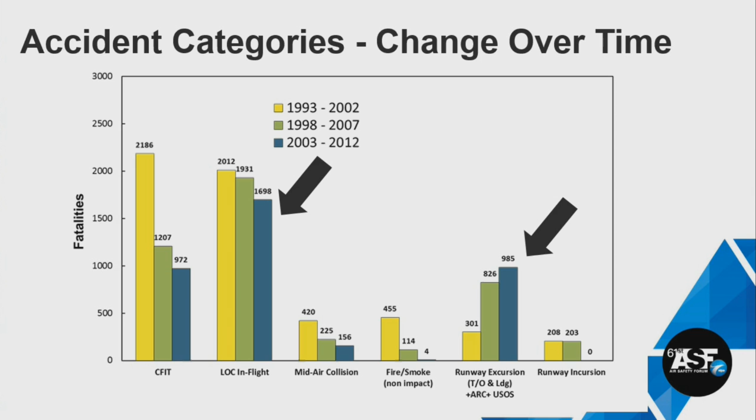Operational considerations are important, training is very important. So we're working in all these areas and working with ICAO, other manufacturers, pilot groups around the world to help get some information into their hands to help in these areas, as well as looking at different technology that might be available. But these are the two areas from a safety standpoint that are really our focus: loss of control in flight and runway excursions.

When we talk about technology, I've got to give credit to a colleague of mine at Boeing. He was here a couple of years ago, Mike Carriker, and he talked about the changes in technology that have taken place over time. So I'm stealing a little of his material, but I thought it was a really good message because it puts things into perspective. These are some of the areas where we've seen some big technology changes from the 727 to what we have today in the 787.

In the area of auto flight, the 727 has some pretty basic modes on it: heading hold, altitude hold, and VOR track, and that was about it. Today, you got guidance from 50 feet on takeoff right down to rollout. So pretty precise autopilots today.

Flight directors weren't coupled to the autopilot. Today, they're fully coupled to the autoflight system. No auto throttles on the 727. Today, auto throttles from toga all the way to flare, so very, very integrated systems.

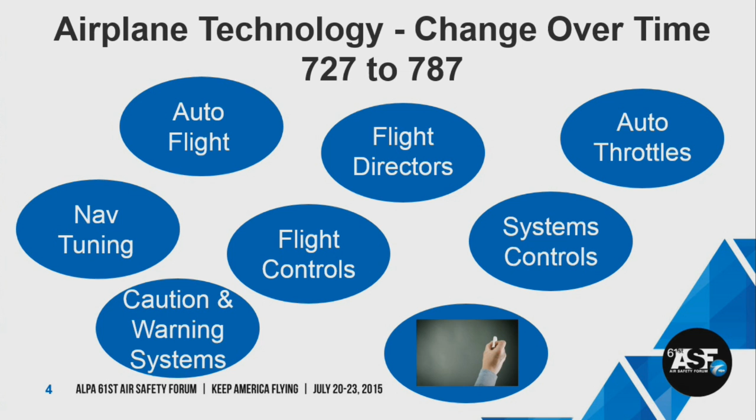In the areas of fuel systems, mechanical engine fuel controls—today we have FADEC with auto relight, auto shutdown, auto start, everything's automated today. Flight controls: cables hooked up to actuators, and today closed flight loop systems, flight control systems that have all kinds of alleviations and compensations that are all automatic and the pilot doesn't even know what's going on. Caution warning systems were very distributed in the 727 days.

With the 787, we have EICAS. And certainly all the systems on the 727 were pretty much controlled manually, and today our systems are all controlled automatically. And the other little bubble down there is a chalkboard. I put that on there because with the 727, you could draw out the systems on a chalkboard. Today, you'd be kidding yourself if you think you could draw out the systems on a 787, even on a whiteboard. So lots of changes just in the way that we look at technology.

One of the areas that we're working on in terms of new things in technology is our Eco Demonstrator program. We started this back in 2011, and since then we've looked at about 40 different technologies. We started on a 737NG, then a 787, and in April of this year, we launched our Eco Demonstrator 757 program in conjunction with the TUI group out of Germany and NASA. So we're doing some joint things with those two organizations.

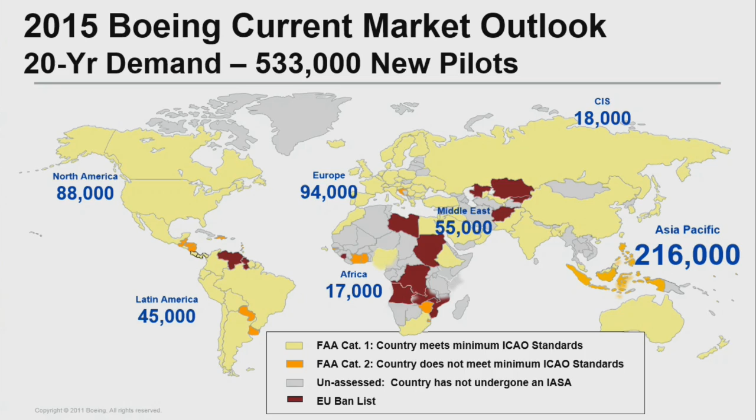Now you see this map and you see some colors on there—the magenta color. Those are countries, and here's the real risk that's out there for these kind of numbers. The magenta colors are countries that are banned by the European Union from flying into the EU, and the orange countries are countries that are prohibited from flying into the United States. So we're spending a lot of time trying to get rid of those orange and magenta colors. What we're talking about here isn't necessarily unsafe airlines—it's regulators that don't have very good capabilities or the capacity to oversee these airlines and operate a very good system. So those of you that fly internationally, this is important to you too, because you're flying into some of these countries. A lot of work is being done by Boeing working with these various regulators around the world, again to try to get them all yellow like North America and much of Europe is.

So those are kind of the three areas we're working on in terms of safety, efficiency, technology, and growth.

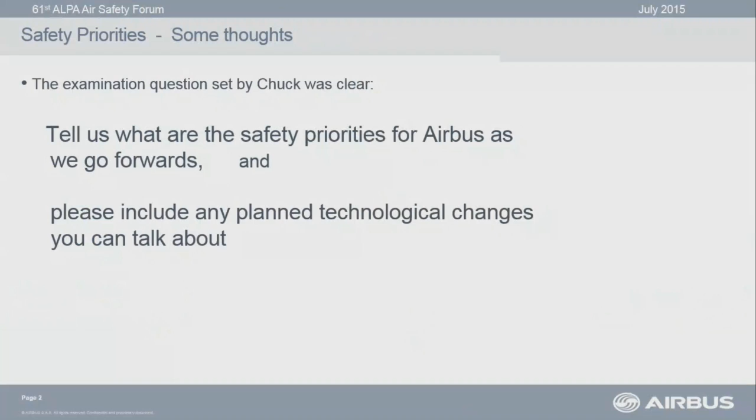The question I was asked by Chuck was to tell us what safety priorities we've got, and tell us, if I can, about any technological changes. So that's what I've tried to stick to.

In terms of safety priorities, I agree with almost everything Tim said this morning in his opening remarks, except perhaps for one, which is that I don't think we've gathered all the low-hanging fruit yet, especially when you look on a global basis, which we have to do inside Airbus. I think in the US it may be more true than in other areas of the world. Certainly, you guys are leading the world, and the rest of the world in many areas looks towards what you're doing and learns from that, and I think that's very important.

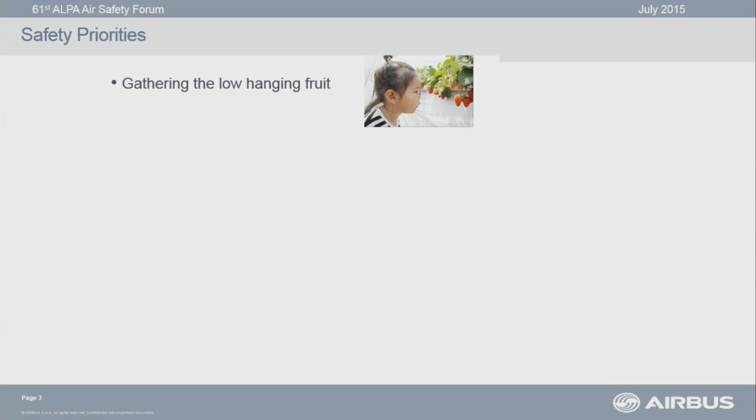What do I mean by low-hanging fruit? I'm looking at everything from regulation, from harmonization, from the development of EBT, competency-based training. Let's get rid of dive and drive—they exist all over the world in other areas. And circling approaches—we now have the capability of replacing circling approaches.

Mentoring is something we've been talking about, but are we doing it really around the world? Certainly not enough, in my view. Best weather on board was mentioned at a presentation before lunch. I think it's time we had better tools for weather assessment on board. It can be done—the technology exists.

I'll also look towards ourselves as manufacturers, simplifying designs. Simplifying design in the operational context, I think, is what's important—not necessarily a simple design, but certainly its use has to be made more simple. Runway grooving in some areas where it's appropriate. And the one I'm going to touch on probably a little bit specifically today is runway condition reporting.

So let me move on, before I do that I'll just talk about the others quickly. The second priority for Airbus, I think, is what we'd call finding solutions for the developing paradoxes of success.

What do I mean by that? Well, the safety level we've just been talking about—we're talking an accident statistic of 1 fatal accident every 10 million movements at the moment. The equivalent when I started flying was 64 fatal accidents per 10 million movements. But that safety level is causing us some problems, and causing the industry some problems.

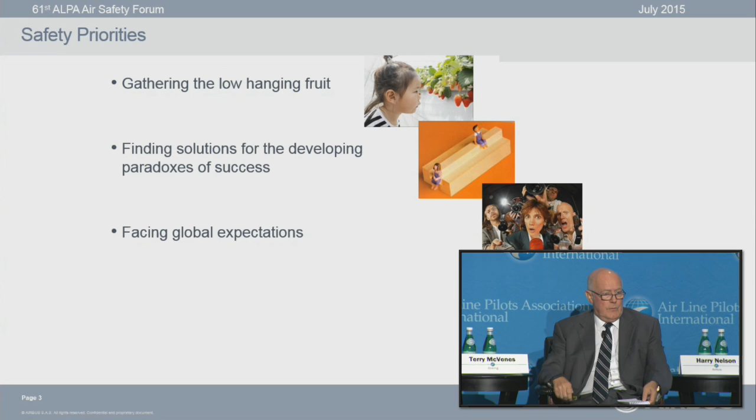Facing global expectations. I think Terry's touched on one of the biggest with his talk about the eco work that's huge now, going on across the world. But I would also add the expectations of the public. They're the people that put bums on seats. They're the people that pay. And I think we have to think very hard about what the expectations are through that.

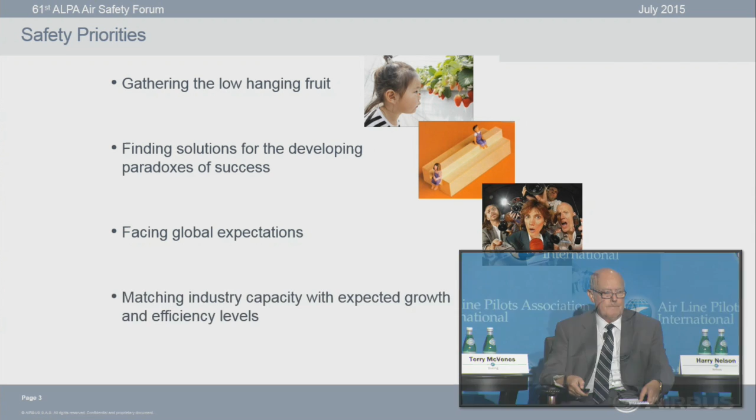Probably for me, one of the biggest is matching industry capacity with the expected growth. Again, Terry touched on the growth, I won't go into that in too much depth. But I think we've got some serious issues here, in certain areas of the world particularly. Are there enough runways? Are we building enough infrastructure to contain doubling the growth in the next 20 to 30 years? If we look forward, I see a big threat here and something we should be looking at.

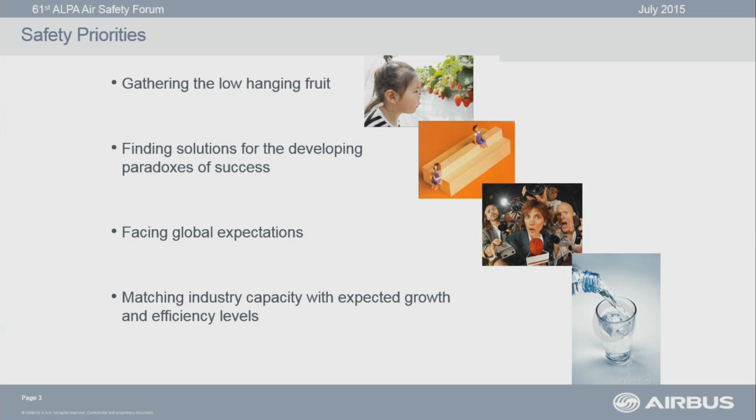And those are the two I'm going to focus on. So let's look at this runway condition problem for a moment, because I want to move towards the second part of my exam question, which was to do with technology.

By the way, while we're talking about technology, what you guys can't see is, looking at me down here, is a clock that's ticking down, and the figures are about a foot high, and I applaud ALPA for its accuracy, because we've got hours, minutes, seconds, and tenths of a second. So catching my eye all the time is this tenth of a second clock that's rolling at a hell of a rate. So if I'm speaking too fast, guys, blame ALPA because of this clock.

Okay, back to runway condition. We know the issues here. You're all pilots, many of you anyway. You know the issue with runway condition. This is something that's been going on for far too long.

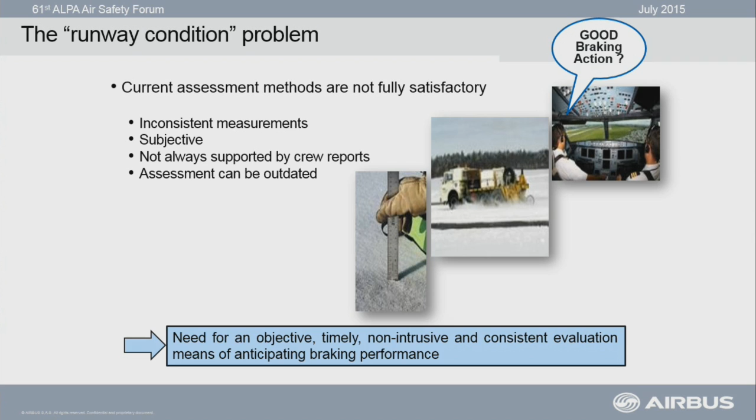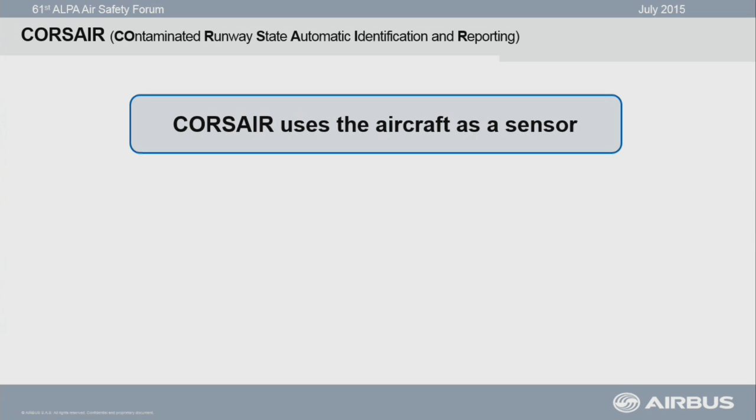We saw a need for an objective, timely, non-intrusive system that would actually help us solve this problem. I'm not saying, by the way, that runway reporting is necessarily bad all over the world. I know it's not. I know, for example, at Minneapolis, there are 22 different forms of sensing runway condition. I guess some of you guys operate out of Minneapolis all the time. I've only been there once, but I think I know why. But that is not true for some areas of the world. I can tell you there are some areas of the world with runway condition threats where there are no sensors at all. And that might appear shocking in the US, but it's true.

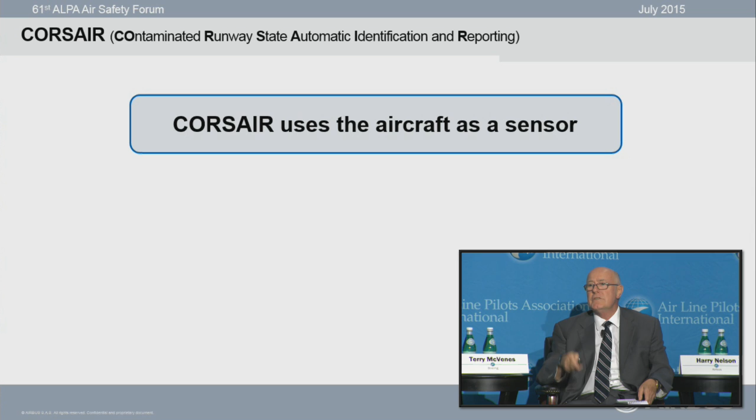This is a system called Corsair that we've developed. I'm sorry about the acronym, I don't like it, but it's what it is. An engineer must have thought that up, and never a pilot. But basically, the concept here is that we use the aircraft as the sensor. It analyzes aircraft deceleration in relationship to the braking that the pilot's applying, or the auto brake system.

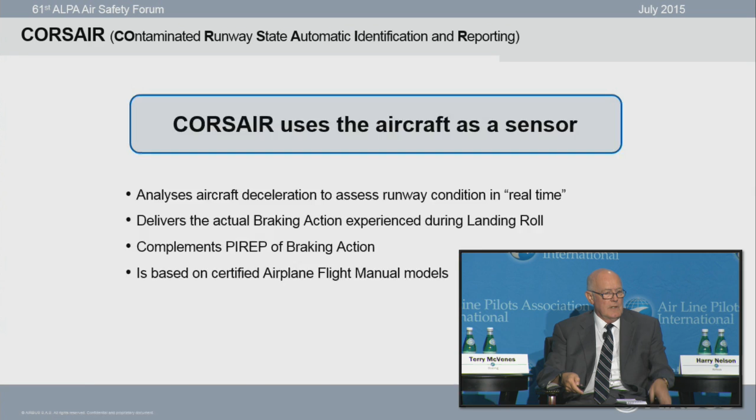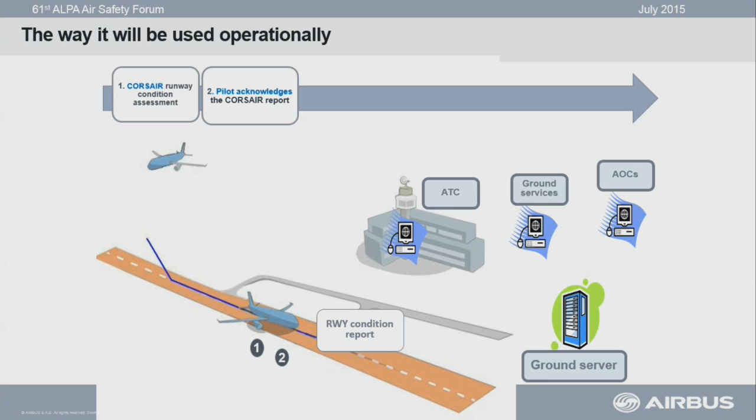It complements the PIREP system and delivers it into air traffic control. Here's how it works: you measure the braking through the aeroplane very quickly, compare it with what you expect, and issue a report which is validated by the pilot. It's sent to a server. Air traffic combines that new, very accurate data with their other sensors, then feeds it to the next aeroplane coming down the approach.

It's not a solve-all problems issue. Some of you will quickly realize that if you're the first guy in the day flying into this airfield, you're really back where you were before. So nobody's trying to sell that. Also, the sensor only works over the section of runway where braking action takes place. I'm not saying this solves all the problems. We're saying it's part of this iterative progress by small elements.

But for sure, the data is highly valid. It's also compatible with the ALPA work that's been done, so the message passed would be in simple pilot language, not engineering speak. But we think it's a good solution.

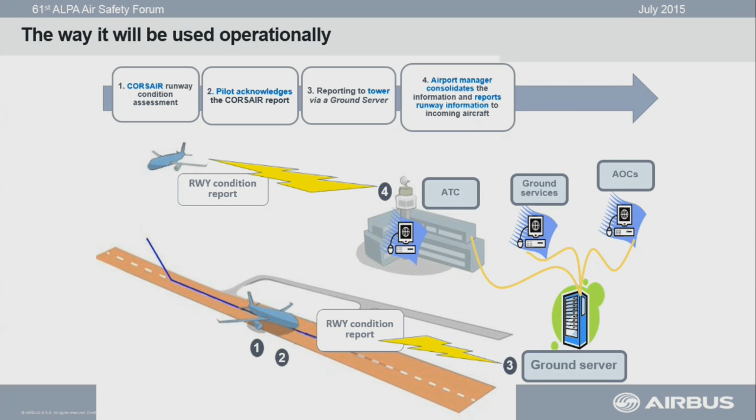The reason I brought it here to you guys - and there's something on this slide I want to mention, that line at the bottom - I want to reassure you that there's no intention, nor any plan, for using this data to assess pilot behavior or pilot performance. Absolutely not. I just wanted to make that completely clear. And the airport still remains accountable for the information on runway surface.

But the reason I brought it here is because we need an industry standard on this. Airbus will not do this on its own. We don't think that's the appropriate route. We seek support, and amongst the important groups from whom we seek that support, you are one of the most important.

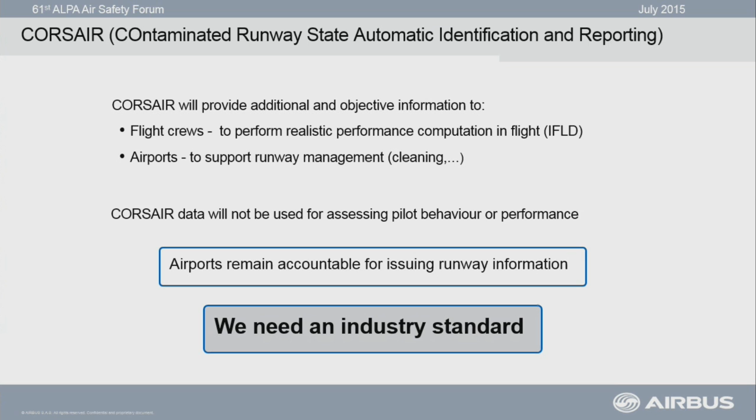Let's talk about training then, because it's also part of those two elements I talked about at the beginning. We think training has to change, and has to be modified as we move forward. The current training system has stood us pretty well, but it now needs to be updated.

If I show you a new tool, I'm going to show you this tool called ACE. I've got a 2-minute 10 film here very quickly to show you. Airbus Cockpit Experience Trainer, also called ACE, is the essential brick of the new Airbus flight training philosophy, introducing simulation at a very early stage.

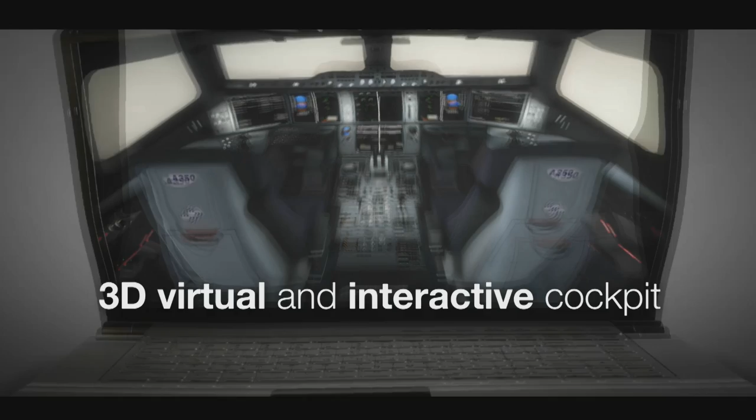For pilots transitioning to the A350 XWB, the first encounter with the aircraft will be in a 3D virtual and interactive cockpit. ACE Trainer is a laptop-based training device allowing trainees to develop systems knowledge and procedures.

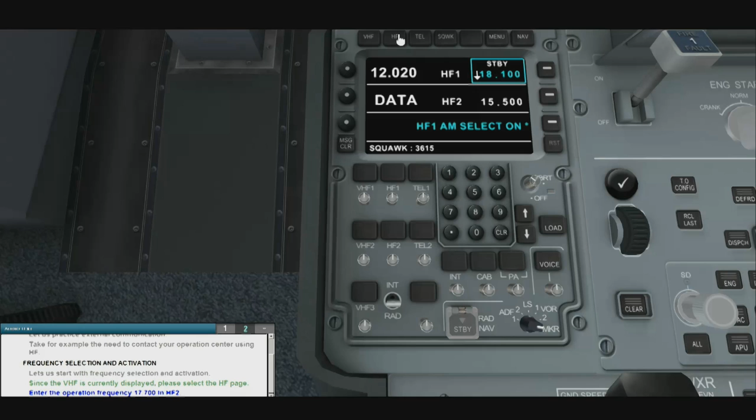Trainees can perform self-paced study with virtual instructor assistance. Enter the operation frequency 17.700 in HF2.

The use of ACE eases the systems knowledge acquisition with a focus on need-to-understand lessons. The engine has 3 rotating assemblies, each composed of a compressor, a shaft and a turbine. Then a learning-by-discovering method is applied. Through guided exercises, all entries are controlled and corrected.

Trainees can practice standard operating procedures as well as abnormal procedures in a simulated crew environment. Thanks to free play simulation, trainees can strengthen their skills at their own convenience. Use ACE Trainer when, where and how you need it. ACE Trainer is also compatible with tablets.

Why choose ACE Trainer? Hands-on learning from day one in a cockpit environment. Better knowledge retention, significant time saving on higher level devices, free play simulation for systems practice. So now with this, you can take the A350 cockpit home with you. Airbus Cockpit Experience - ACE by name, ACE by nature - for efficient, effective and fun training.

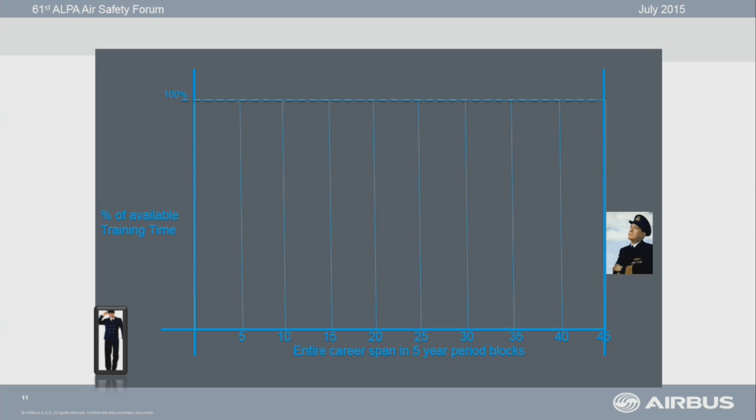What we currently see is a sort of ratio like this, and this is based on, it's not precise, by the way. Please don't think this is precise. It's meant to be indicative rather than precise. But for many areas of the world, what I'm seeing is a lot of checking time and not a lot of what I call training time. The question is, as we go forward, is that good enough? Because with each year, with each new accident, we're asked to force more and more things into this training pot on top of the regulatory stuff. What I think is more appropriate is probably something looking a little bit more like this.

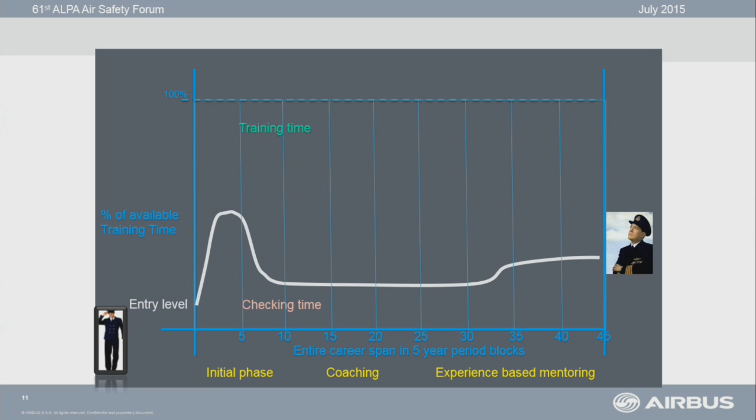Where we see no more than 50% of any training budget being spent on checking, and not only at the beginning, but certainly we have to have a strong investment on training at the beginning of a career. We then open up the long middle years of somebody's career to a much more learning environment. And then at the end, when you reach my kind of age, a bit of senility creeps in, and we do need to keep on checking a little bit more regularly that people can still cut it. So what we're seeing then is an opportunity, and I think we recognize that behind this opportunity, there are all sorts of things that need doing better than we're doing today.

One of the things that comes out of this discussion when I talk to a lot of pilots is that a lot of guys around the world in different places feel that when they get captaincy, they've made it. That's the top of the hill. There's nowhere else to go. I don't accept that. I believe that there is still continuous learning and a lot of other things. I'm still learning at my stage in my career. Every day I learn something new about aviation.

And I think we've got to encourage that in our future pilots as well. We've got to be in this kind of environment, a fun environment, where I look forward to my training sessions because I'm going to learn something new. I'm not threatened by them. I don't feel that there's only two things that are going to happen. One, nothing changes because I pass. And two, I have a bad day and I fail and my world falls apart. I shouldn't feel threatened by training. We should be looking forward to it.

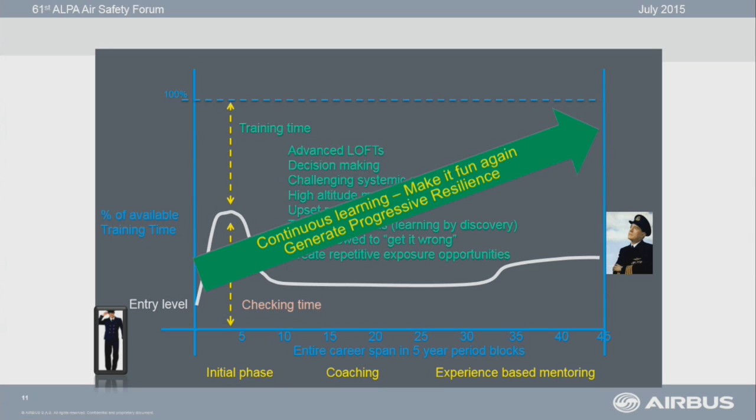We're trying to develop progressive resilience. And by that I mean being able to react to any situation by thinking the problem through and getting our thinking right rather than a specific drill right. When I'm challenged by people who say, well, that's all very well, but you're dreaming, Harry, it won't work budget-wise, I challenge that too, because I think actually, provided we invest at the beginning, we can save budget later on in a pilot's career.

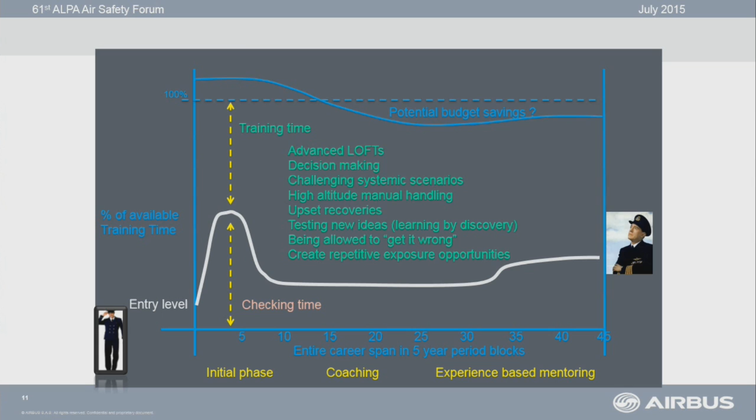And really, I kind of move on to the last 2 points on training, which are candidate selection, an underestimated area, I think. I know it is more strongly focused here in the US, but not everywhere. And finally, the quality of instruction. Think back to the growth problem, think back to the success problem. They're all linked, these problems. How are we going to maintain the very best of instructors and have that experience through exposure being passed on from generation to generation?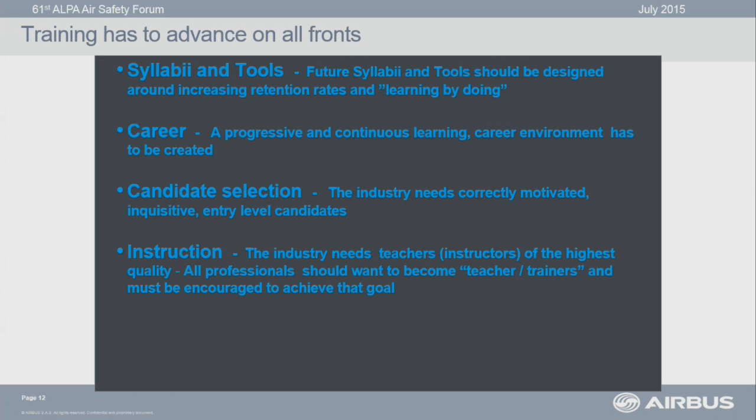The objective, again, is to generate resilient behavior. So with that, I'll hand over and I'll leave it at that. I hope I've stimulated some thought and I look forward to questions later. Thank you for listening.

Thank you. Harry, always great to hear you and get some of your points. I have a couple of questions myself as a result of your presentation. I think we could kick around a little bit.

A lot of our membership flies Boeing and Airbus aircraft, but there's also a considerable percentage of our membership that flies regional aircraft. We're pleased to have Embraer here. Captain Perini, give us Embraer's perspective on safety and what's coming down the road from you.

Thank you, Chuck. Ladies and gentlemen, good afternoon. On behalf of Embraer, I would like to thank the Air Line Pilots Association, Captain Tim Canoll, ALPA President, for the opportunity for Embraer to be here in this important event. North America is an important, strategic region for Embraer. We have more than 70% of our fleet flying here in North America.

Regarding safety, we consider that North America has a good level of safety, but good is not excellent. Taking the words of Captain Tim Canoll, there is always more to do.

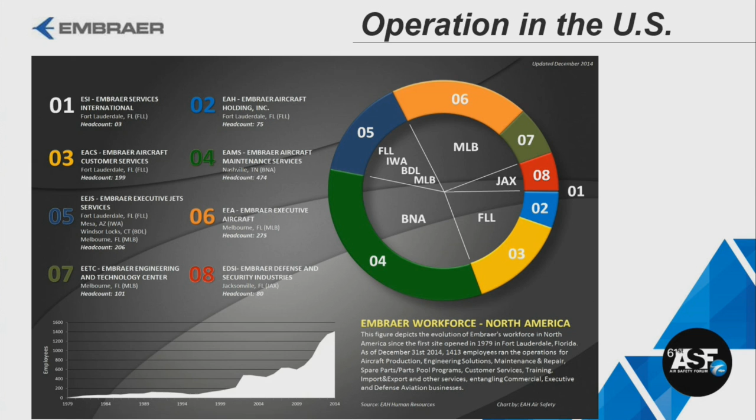The main Embraer business area is commercial aviation. Nowadays we are developing the new E2, the new E-Jet. In executive aviation, we just launched the new products, the Legacy 450 and 500. And last year, in October, we flew the new Embraer cargo military plane.

The base and foundation of our services and support is safety. To ensure we have this foundation, we have inside Embraer an air safety post-graduation course, and we have close to 400 air safety representatives working in all areas of Embraer to ensure the services and support have the foundation of safety.

Despite the fact that we have 400 employees working with safety, we have dedicated personnel that stay mainly in Brazil, where we have our main headquarters. The responsible area is South America. We have an office here in the United States under North American responsibility, one in Amsterdam responsible for Africa, the Middle East, and Europe, and another office in China, Singapore, and Australia, covering practically the entire world.

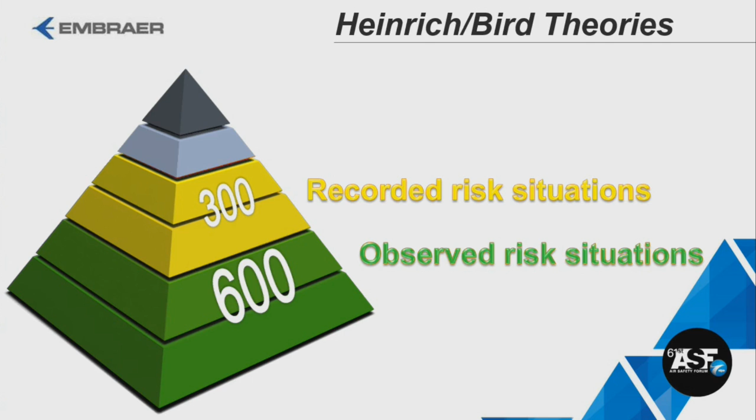To talk about safety and process, I'd like to come back and remember the Heinrich pyramid. According to the Heinrich and Bird theory, for every 600 observed risk situations, we have 300 recorded risk situations, 29 incidents, and 1 accident.

As a manufacturer, we strive to avoid accidents. But if one happens, it's the moment to analyze fast and take action according to the safety recommendation. Inside Embraer, we issue recommendations, and we need to be very, very fast. We understand that we need to give you pilots and operators quick answers, because you operators continue to fly the same aircraft, sometimes in the same environment.

And for this reason, I like to use the dollar bill symbology, because it's the moment that we need to open our eyes and make it better. Improve our plane, improve the procedures, improve the training.

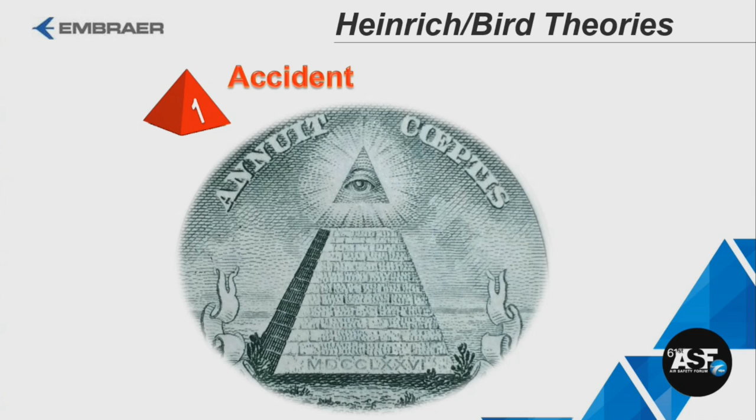This is our goal. When we face an accident, the aircraft crisis management plan is automatically launched inside Embraer. According to this plan, we have 3 committees: strategic committee, media, and investigation committee, to help the authorities, to help the investigation authorities and to help the operators.

And if you have an incident or accident inside the Embraer factory, we have the emergency response plans. We have interface with all the investigation authorities in North America. According to Embraer, it's a good interface, mainly with NTSB, because you have a lot of suppliers here in the United States, and practically in all Embraer events we have the presence of NTSB. And we used to work under Annex 13 because we are ICAO signatory.

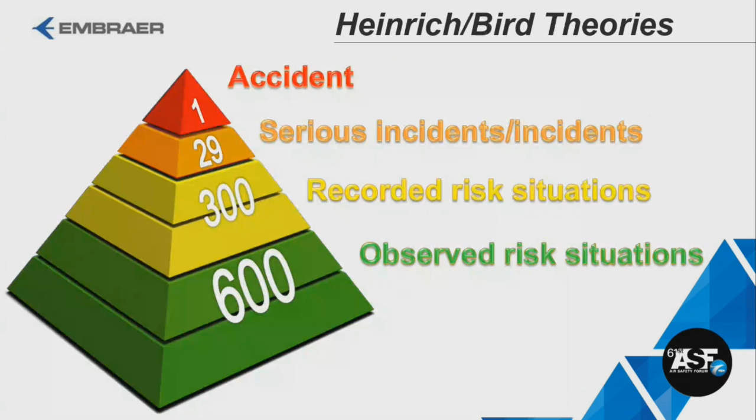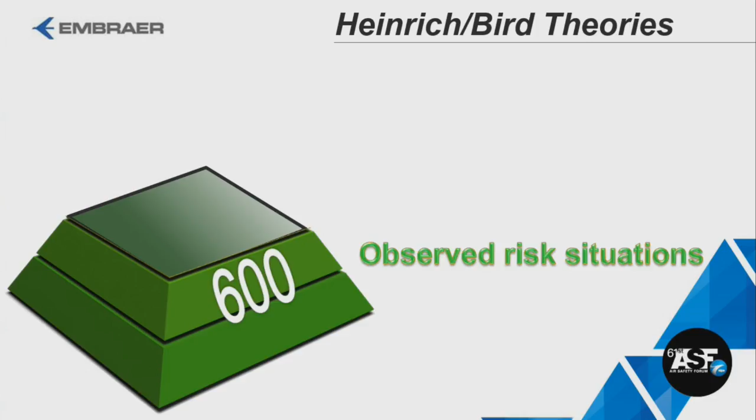Coming back to the Heinrich Pyramid, in order to avoid the accident, we need to work in the base of the pyramid. Embraer has a robust and mature process that works really in the base of this pyramid. In 2006, we received an award from Flight Safety Foundation because with this process we really mitigate the risk.

This analysis starts with you, operators, when you issue a safety report to Embraer. We receive this issue inside Embraer, our air safety department, and this starts a risk index calculation. It's a quantitative approach that involves all the engineering inside Embraer, test pilots, airline pilots, and we arrive at the risk index.

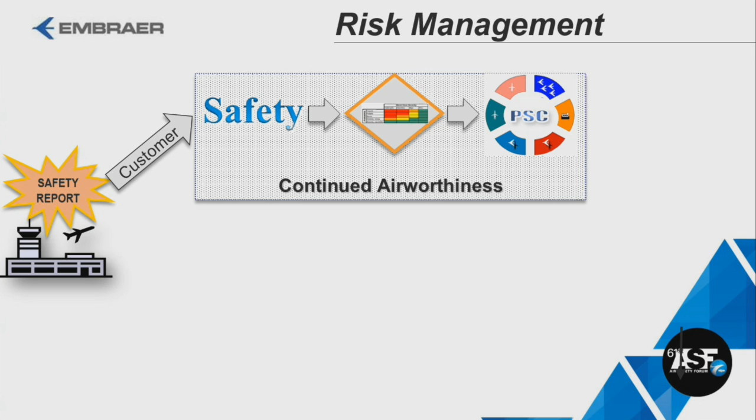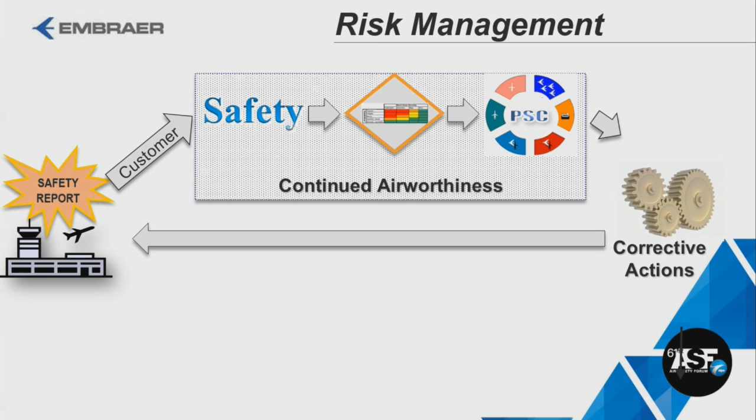And these risk indexes are submitted to the Product Safety Committee. I would like to talk later about this committee that allows us to work with the corrective actions and introduce these actions in our fleet. We have another process, an internal process, part of the prevention program. It's a qualitative approach, not a quantitative approach.

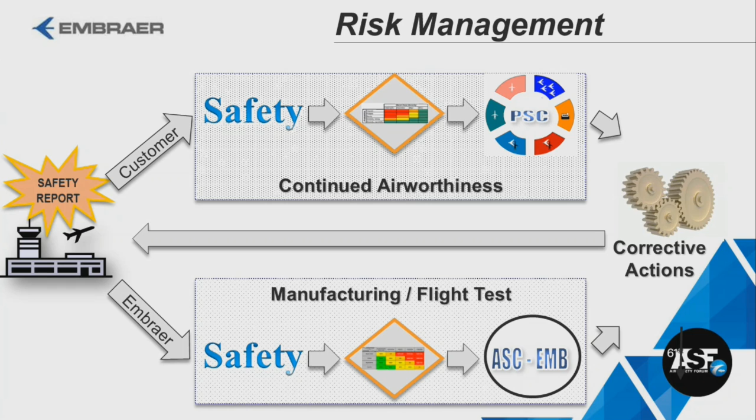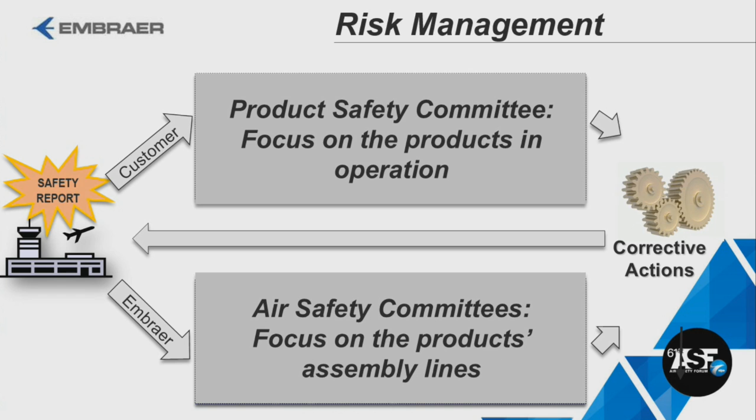The main methodology regarding the product safety monitoring that affects you, operator, is the first one. It's a quantitative approach. And the second is basically focused on the product's assembly line.

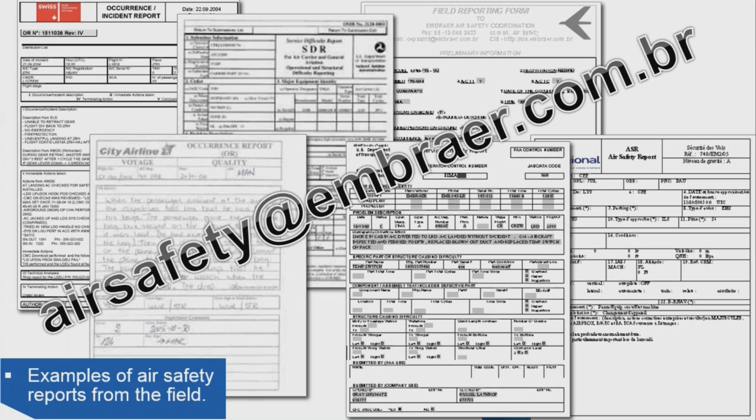As I said, this process, this methodology, starts with you, operators, that send to Embraer the safety reports. And for this reason it's very important to receive the issue, the event, as soon as possible, so we can start the risk index calculation.

The risk index calculation is based on the product of severity and probability, plus the level of control. After we have the risk index, we have the validation for PSC, and we have this timetable: the time to accomplish, the time to define the action, after that the time to make this action available for you, and the time to accomplish, to introduce the action in our fleet.

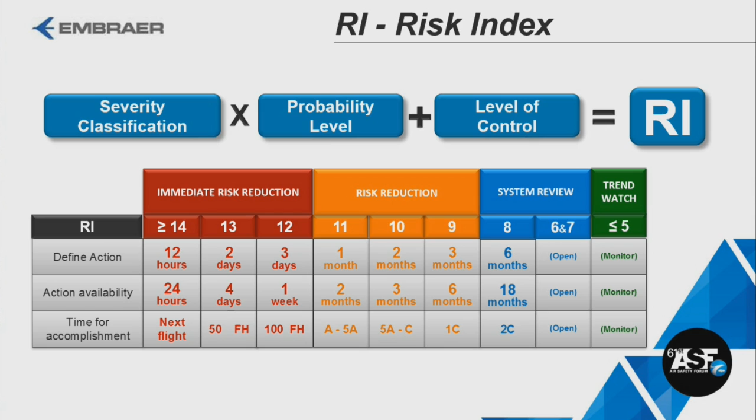Sometimes we need to ask for the certification authorities for an AD, in order to ensure that all the operators will introduce this modification in their fleet.

The Product Safety Committee is a higher company staff with practically all the areas in Embraer, that is responsible for the validation and for that timetable.

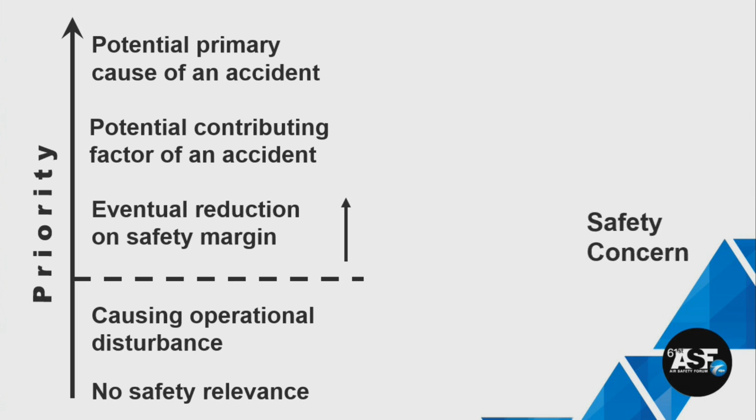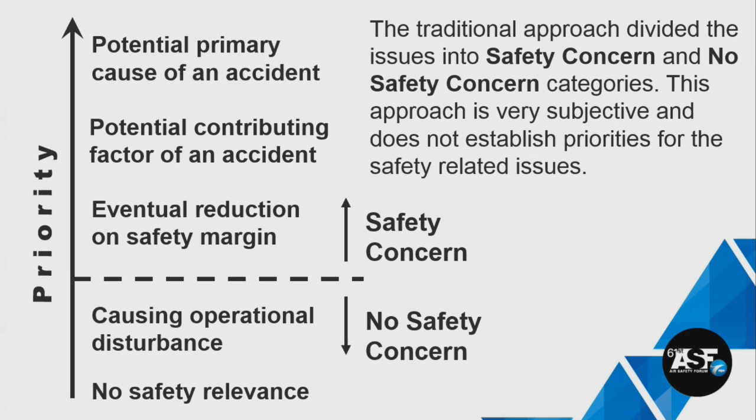According to the old approach to classify, to prioritize safety issues, we had a borderline, a limit, when we have safety concern or no safety concern. But with the new risk index methodology, all the issues are safety concerns in different levels.

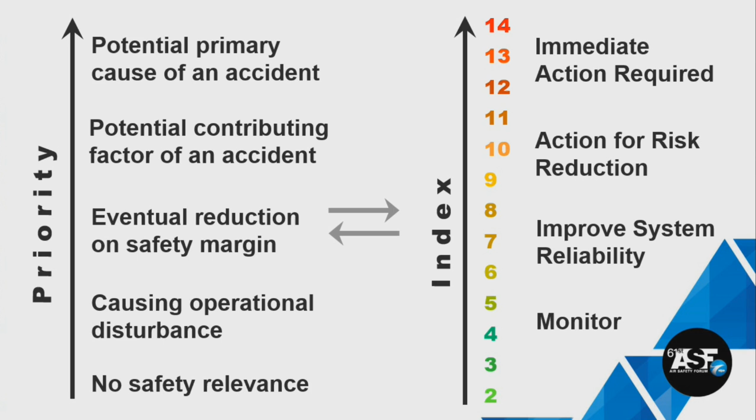This is the most important. We have, as a prevention program, the Embraer Operator Safety Meeting. This is the opportunity when we put together all the operators around the world to share experience regarding air safety, to complain about the aircraft, the procedures, in order to improve our product.

But we also have the operator's in-house visit. We mainly do this visit during the entry into service phase, or when we detect an increasing incidence of occurrence, increasing incidence of incidents, for example, or under operator's request. Mainly in this case we have customer-oriented case studies, lessons learned, according to the operation of this client.

Talking about contributing factors, I'd like to highlight the human factors as a big proportion nowadays that cause accidents, and the new aircraft concepts that Embraer developed in our aircraft to avoid human errors.

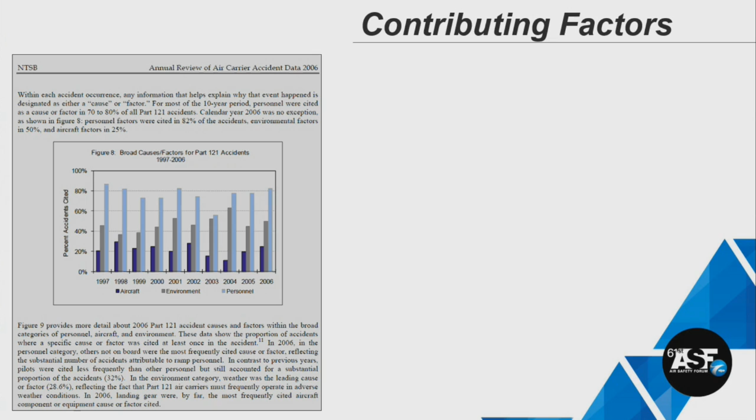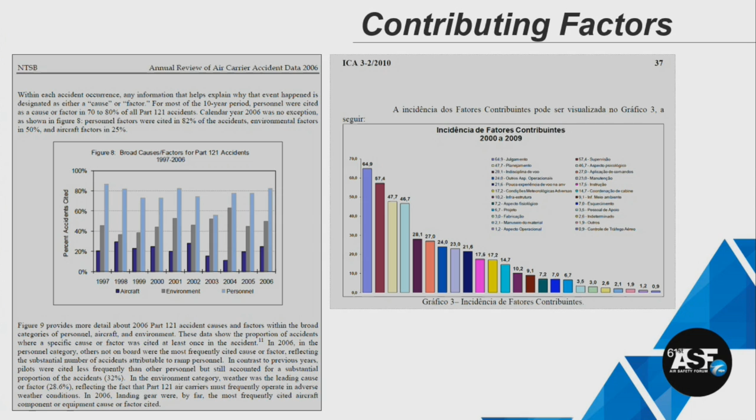According to NTSB, this proportion is close to 80% due to personal, human factors, and 20% is aircraft. According to the Brazilian investigation authority, CENIPA, it's practically the same percentage: 80% is human factors, and inside that 20% aircraft you have maintenance. Actually, only 12% of the contributing factors is material factor.

As a manufacturer, we could think that we are doing a great job. Again, take the words of Captain Tim Cannell: I just do my job. But in fact, we need to improve our products. We need to produce aircraft that are more friendly, more intuitive, and easier to fly. Because if it's easier to fly, it's easier to teach, easier to learn, and the aircraft will be safer. The aircraft equipped with systems that avoid human errors.

I like the given example about the smartphones. But for you pilots, I'm not saying that you don't need to read the manuals, okay? But in fact, we need a smart system in our aircraft.

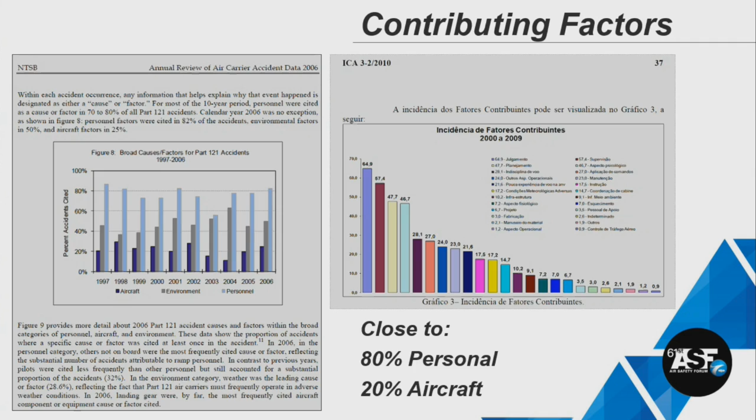This is some concept that we are using to develop our products. The first one is closed-loop full fly-by-wire controls. It's the kind of law where no matter what kind of inceptor you are using to control the aircraft—yoke, passive side stick, active side stick—the result in terms of control is the same, even if you are using the guidance panel, automatic fly. And according to this fly-by-wire law, the aircraft is protected throughout the envelope.

About high level of automation, inside the control law—Embraer control law, for example—we have the automatic correction in case of engine failure. The aircraft only applies 5 degrees in order to have a better result in terms of aerodynamics, and in order to raise the situation awareness of the pilot during an in-flight shutdown. It's an example of the importance of automation.

An intuitive cockpit with reduced workload. Regarding reduced workload, we have a few normal procedures and few memory items, or sometimes no memory items, in our checklist. And regarding the aircraft system, the reconfiguration in case of failures.

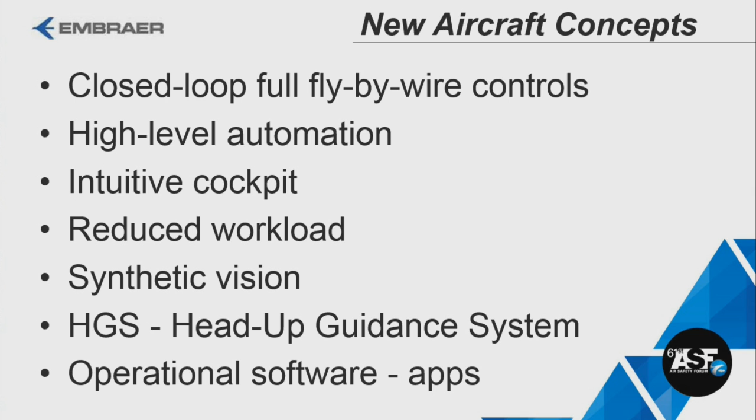Our Legacy 450 and 500 have all the high-end technology in terms of avionics inside. We supersede the requirements that came from the authorities, and we have full fly-by-wire controls and passive side stick in this aircraft.

In the new cargo airplane, the Embraer KC-390, it's practically the same fly-by-wire control laws, but with active controls. Because this aircraft flies close to the borderline of the envelope, we believe that an active side stick is better and safer for the operation.

Regarding the new E2, the new Embraer E-Jet, this aircraft is practically a new plane with new wings, with laminar flow, new engines that save at least 16% of fuel, the same full fly-by-wire control, and improved avionics with synthetic vision, with 4 big displays where we can have 8 fields to raise situational awareness, and with important systems inside.

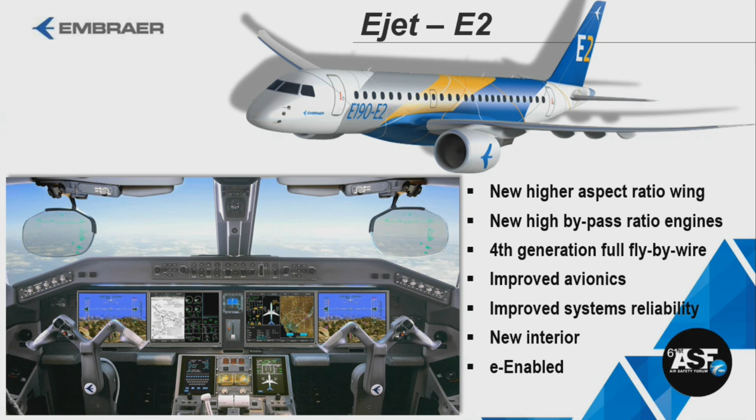One of the systems we developed with Boeing is called RSAT, Runway Situation Awareness Tool. We have other agreements with Boeing for cooperation regarding safety, and this is one among other programs. In this program, we are analyzing practically all Boeing overrun incidents, the contributing factors, and all Embraer incidents, in order to provide a system to avoid runway overruns.

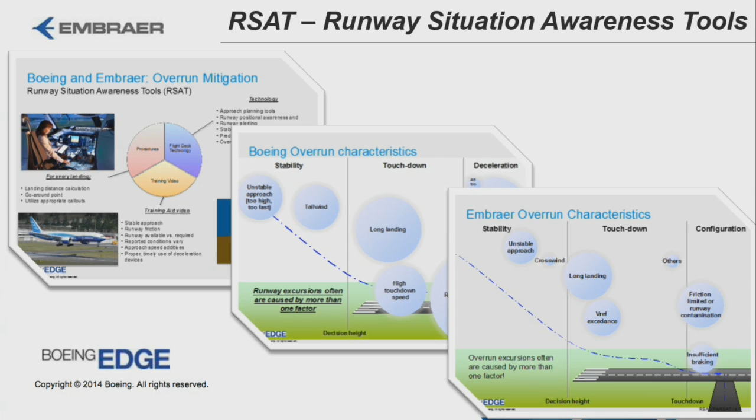But we are also working on training and procedures. As a tablet solution, we have the e-Performance tool according to the TALPA ARC recommendation. TALPA ARC recommends the in-flight assessment, and this is an important tool because in a few seconds the pilot can recalculate the runway length needed given the actual situation—if it's wet, the wind, the gross weight. It's very important.